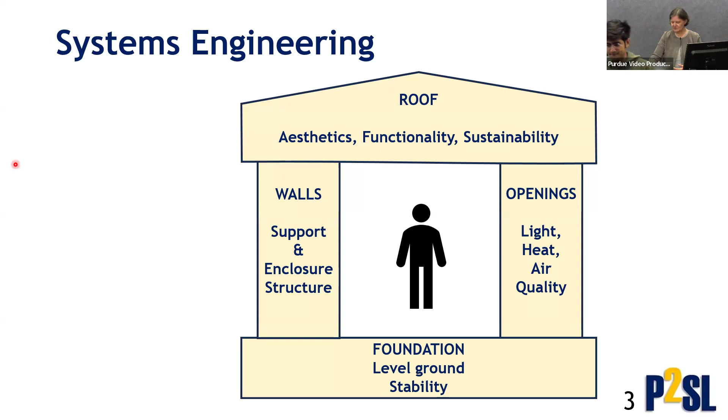But of course, what's really important about the functionality of this house is that all the different systems have to work together, right? They have to be attuned to one another. It isn't just about optimizing one part and ignoring the other parts, right? So in Lean, we very much talk about systems engineering and applying the scientific method for that. So here's the metaphor that Toyota uses to describe their Toyota production systems.

So the reason for segueing into Toyota is that besides this aha moment that I and colleagues had about there's something missing in our managerial theories for project management, around the same time in the 1980s, early 1990s, it became very well known to the world as to how Toyota was designing and making cars. And it turns out that in the course of about 50 years, Toyota went from a virtually nothing company to the world's biggest, best car maker globally.

And you can imagine, especially the American automobile industry was very much in shock about that being the case because they had been very much at the forefront of designing newer and better cars. And how could it be that there is this Japanese company that does things differently? So a large study was commissioned, performed by people at Harvard and MIT. They went to Japan, they studied the Japanese methods, and they realized it wasn't specifically a Japanese method, but it was Toyota that had very much figured out a different way of designing things and building things.

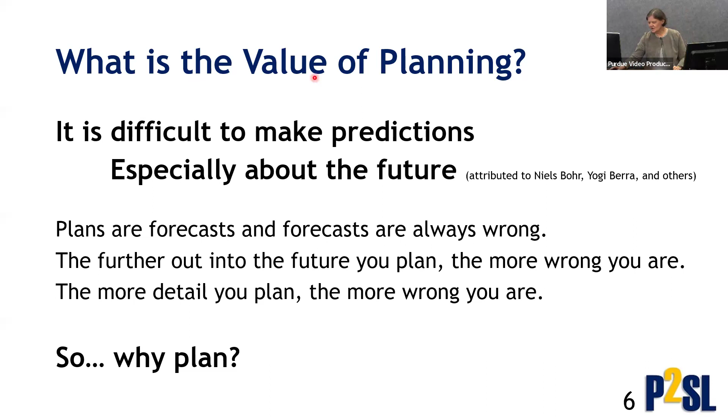Right, so then how do we think about planning? What does planning look like? So in traditional project management, we think of it in this way. You have this very big scope of work that needs to be done. Of course, it's much too big to do everything at once, so we're going to break it down in smaller pieces. We can specialize. Different people will be better at doing certain smaller pieces of the whole.

So doing the work here is called transformation. To do the work, you need certain inputs. You have certain methods to execute, and you would produce certain outputs. And then we break the whole down in smaller pieces. We give one piece to one team, one piece to another team, one piece to another team.

And in this approach of divide and conquer, our assumptions are that if we can do every piece as optimally as possible, we think that we will also perform the project in the most optimal way, right? And that seems reasonable, and that is true, but only in one condition. And the one condition is that you can break down the whole in pieces that are totally independent of each other. Now, that in reality never happens.

The pieces that you have, you can handle them as independent pieces, but they will have interdependencies between them. And you can sever the interdependencies in going from the whole and breaking it down in pieces so you can address the smaller chunks. But you will find when you put the smaller chunks together that maybe they don't go as well together as you had imagined to start with. Maybe the whole, therefore, is not produced as optimally as you can.

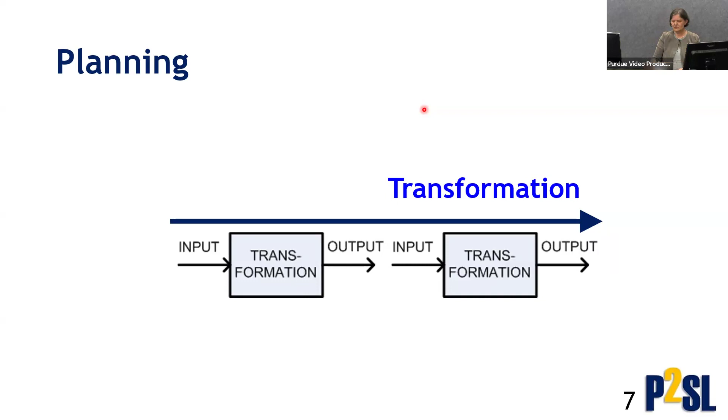So the knowledge that we have, the model that we have in mind as planning, as dividing and conquering, maybe we should describe it as work as imagined. We divide the work and then we think, oh, this work is going to be done in this and this way. And as unfortunately many of us do, we hope that everything goes as planned.

But is that the case? What is the chance that everything will go as planned? Again, zero chance. Things will not happen as planned. So the counterpart of work as imagined is what we call work as done. And I'll give you one example and see if that resonates with you.

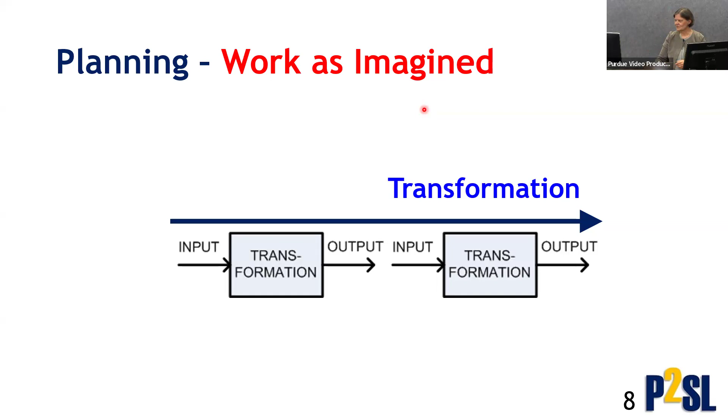Of course, in this case, it's pretty obvious, but there are many other reasons why people may not do what the planner had anticipated, right? People come in with different perspectives. Maybe the drawings, the specifications are not so clear. There's some ambiguity in it. There's many, many reasons. Sometimes people are creative. They have better ways of doing what you actually ask them to do. So many good reasons. I don't need to expand on that.

But what I do want to expand on is this notion that as we plan, we describe what we think should happen, right? This is what we think should happen. Now, the reality is that what can happen is oftentimes quite different from what should happen. You may need ingredients. There are certain prerequisites that need to be satisfied for you to be able to do what you should be doing. And ultimately, what people do themselves, what they commit to doing, what they will do, is quite different from both what they should do and what they can do, right?

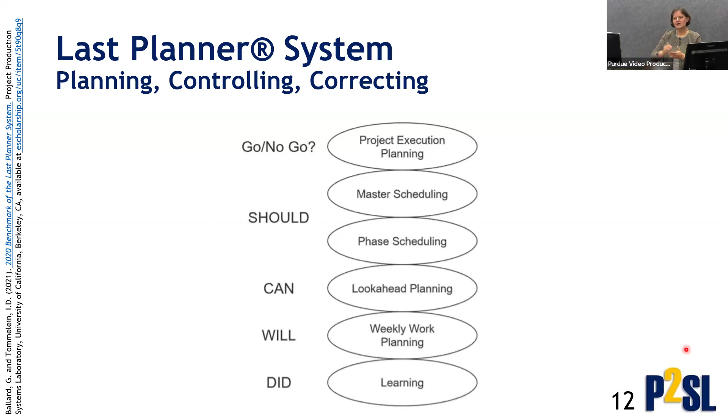Is it a supply chain problem? Is it a lack of knowledge? Do they need more training? Is it poor instructions? Whatever the requirements are. So we can catch the mistake immediately and prevent that mistake from happening again. Right, so that system is what we call the last planner system.

Now, the last planner system begins to address this transformation problem where we need to understand interdependencies and the difference between work as imagined and work as done. But there's other parts that we need to consider in our production systems. So the transformation model is very much this input-output model. For those of you who've been doing scheduling, when we develop our CPM schedules, we simply define precedence relationships between activities, finish to start, and so forth. But we don't really say anything more about what the preconditions are for starting work. And there's usually a lot more to be said besides resources. We need to figure out materials, for example, and instructions and so forth.

So taking a step back, in addition to understanding that there were some pieces missing in the language of project management, such as space, and that breaking a whole into pieces, solving the pieces and putting it back together is not going to give us the optimal solution, we also looked at other bodies of literature out there. Besides the project management literature, which very much is transformation-based, in industrial engineering there's also a whole body of literature that has to do with queuing theory, the theory of waiting lines.

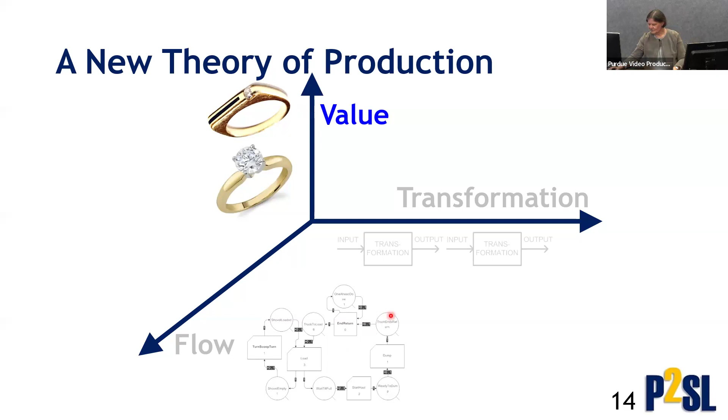Right. So the theory that we have been pursuing here, as identified by my colleague Lauri Koskela, we call it a transformation flow value perspective on production. And the important thing is you need to do all three, of course, and you need to balance, right? You don't want to optimize one at the expense of the other, but you're not going to be perfect in all three at the same time. So you need to begin to weigh. You're going from one to the other.

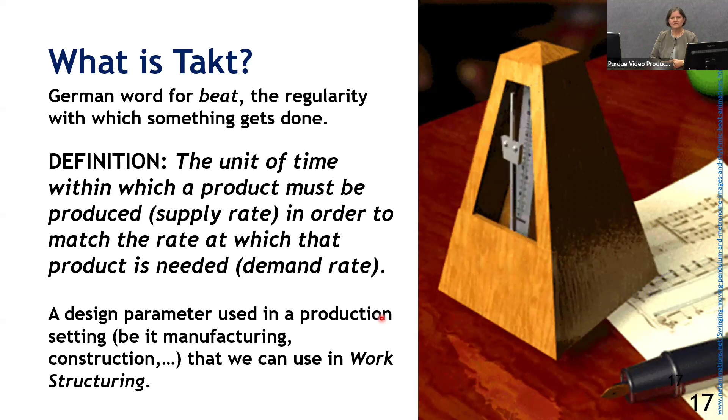So what is takt? What is takt planning? You could see it here with the metronome. Takt is all about establishing a regular beat for production, and the beat is determined, of course, by value, by what the customer wants. If you're going to sell a car to customers and you have the demand for your product at 1 car per minute, then you need to produce at 1 car per minute, right? So we have a demand for the product that is going to help find the takt, and now we can use that takt to actually engineer our project production system.

And where does takt planning fit in the Last Planner System? I think it fits at many different levels. I'll talk today a little bit about operational takt planning, which is how do you actually develop that schedule, that plan, that gets us from the should to the can.

But of course, anytime you're going to change the way we manage and the way we produce things, you need to get everybody on board to understand what the requirements are. And if you want your subcontractors to do anything different from what they're used to, you better tell them before you sign the contract, right? So you need to understand the supply chain implications and make sure that you can align the supply chain to the requirements of the projects.

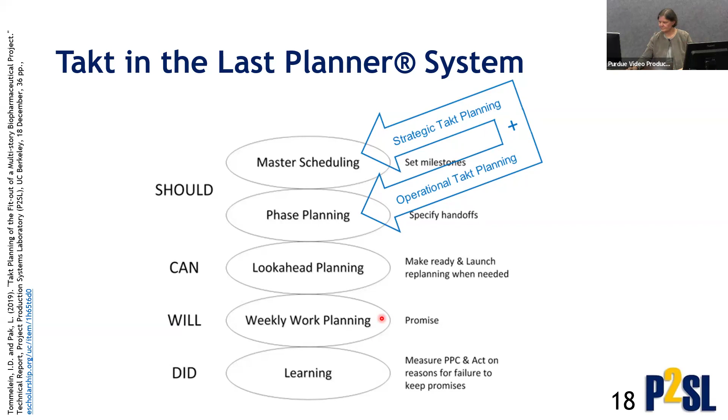All right, takt planning, what are the objectives in the system? Well, we have trades involved. There are trade specialists. We obviously want to tap into their expertise. They know how to do the work. Let's ask them how they want to do the work, and let's try to let them work in the way they prefer, because that's why you have specialists on board.

We'd like to aim for constant crew size and continuous workflow. Constant crew size helps with improving productivity. It also helps with safety performance, and there are many other reasons why that is a good thing. We want at all costs to avoid trade stacking. So we don't want different trades to be on top of each other. And so the rule in takt planning is 1 trade in any location at any one time.

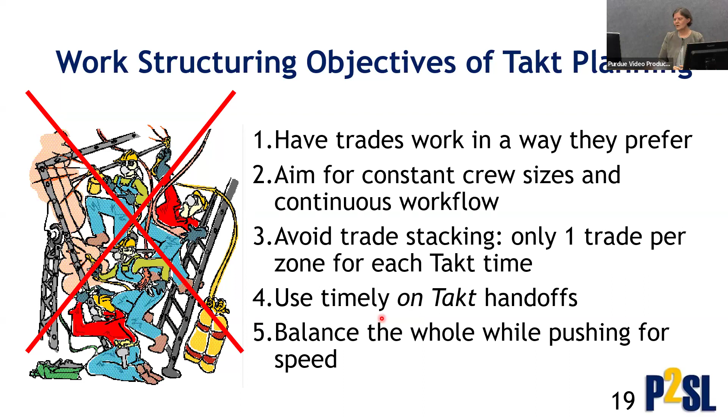Okay? And then, of course, we want to use timely takt handoffs. And then, ultimately, we want to push the whole production system to match the speed that is required by our customer. So a little bit more detail, since I think this is a new topic for many of you.

So what we do in takt planning, I said this is the operational takt planning. So at this point, we know who the subcontractors are, so we can actually go look at the drawings and specifications so we understand their scope of work. We can pick a part of the site, maybe a floor, and we can map out with these specialists what steps they need to perform and who's going to come first and next and so forth.

So we do this process diagram at the top here with sticky notes, color-coded for each different trade. Some trades may not care who comes first, but they know where they fit in the sequence, and so we'll have to resolve who is going to come first, who's going to come next, because we only want one trade in any space at any one time.

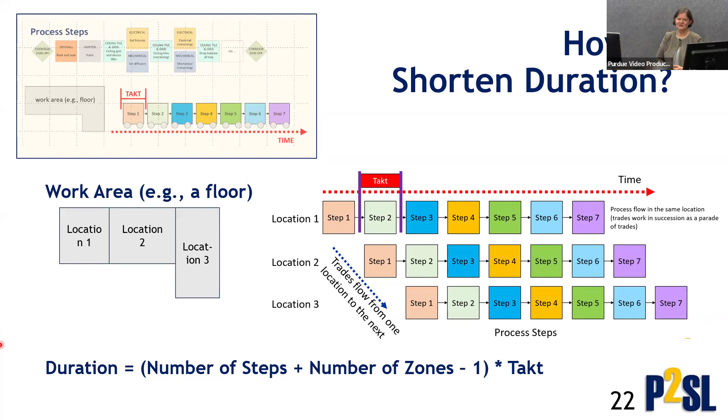So with that, let me move on here. One of the things that you really need to do well is to make sure that when somebody performs work in a certain area, and they'll have to relocate to another area and relocate to another area as opposed to having the whole floor to themselves, you want to make sure that they can relocate without a huge penalty, right? That it's easy to move from one location to another location.

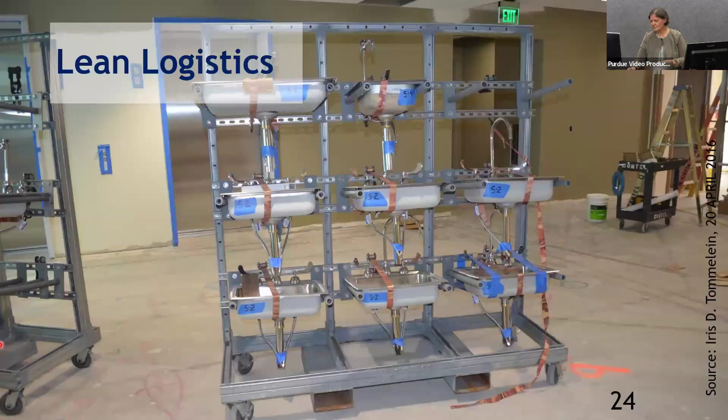And likewise, of course, you need to tune your supply system so that when you are in a location, you have exactly what you want, what you need, nothing missing, right? Impeccable execution. And you don't want to have too much excess, because any excess stuff you're going to have to move, and that's going to cost you extra work. So what does the quick changeover and what does integrated logistics look like? You may wonder. I'll give you an example here from a plumbing contractor working on a hospital project.

So what have they done here? Well, first of all, you notice that they have a cart. Everything, as you can see here, is on wheels. So it's very easy to load these materials to the site. You will see that their cart here has these rectangles, right? So it's easy to lift this with a forklift and move it off the truck and onto whatever floor level you need to be. An important thing we learned is you want to make sure that these carts have brakes, just for reference. It's really important. But anyway, it's easy to move, right? So you can easily relocate from one location to another location. Easily move on site, easily move off site.

The other thing that you see here is there's different components. These are quite extensively prefabricated, right? Many different parts have already been put together on it. You can see even the faucets are attached to it. Some of the drain pipe is attached to it. So this plumber has gone through extensive lengths to prefabricate, and by prefabricating, of course, they lower the amount of time that they need on site to do their work. So that helps them stick to very short takt times.

And then the other thing that's happened, of course, is kitting. So in some of these components, you can see that there's some additional parts provided that maybe they couldn't quite attach to the assembly that they have made. You want to make sure that everything comes together so that your crew doesn't have to wander off left and right to find what it is they need. Okay? So that's what lean logistics looks like.

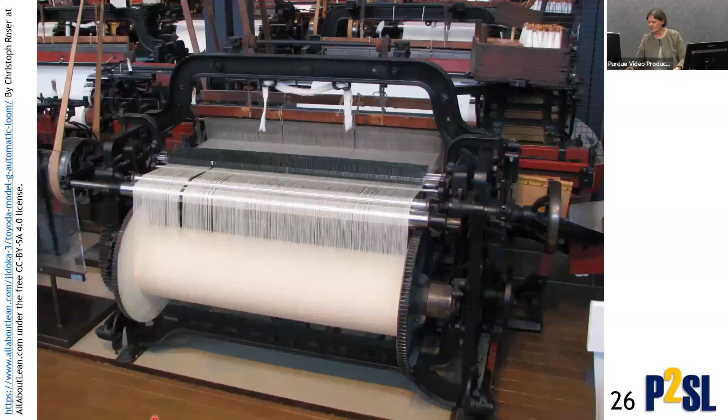going back in history here, this is a loom, a weaving machine. It's very important as a historic piece in the history of technology. This machine actually in 1924 was outfitted by the Toyoda family at the time. The Toyoda family, before they made cars, they actually were in the weaving business. They started in the weaving business in the late 1800s. And they were very ingenious in designing these looms and automating them, even to the point that they had patents, and they would license these patents to the British, right?

The British, who of course had an extensive weaving industry well before the Japanese. Anyway, what's special about this loom is that, of course, with the loom, you have a shuttle going back and forth, and every once in a while, a thread breaks. And as soon as a thread breaks, of course, you're going to have a defect in your fabric.

And the sad thing about that is, well, besides having the defect, depending on how much fabric you already have produced, maybe you have to throw everything away because there's nothing you can do with a piece of fabric that you already have. So it's costly to have defects, right? That's true for weaving, that's true for anything. It's always costly to have defects.

So Sakichi Toyoda at the time devised an ingenious mechanical way for this weaving machine to automatically stop if one of the threads broke. So he had a counterweight mechanism, and as soon as the tension stopped, the whole machine stopped. So why is this good, right? You're still making a defect.

The good thing about it is, before that, you had to have one person per machine keeping an eye on whether the machine was continuously working. Now, if the machine automatically stops, you can have one person supervising 10 machines, 20 machines. Right? And that's really the notion of the Jidoka, or the autonomation part.

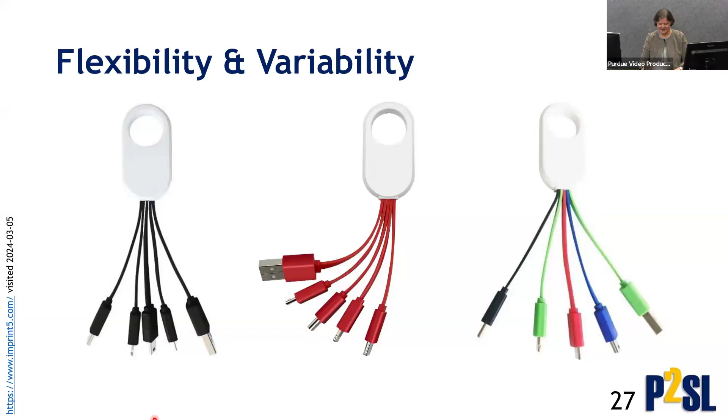So this is what we're thinking about when we think about mistake proofing, when we think about what can go wrong, and how do we make it easier for people to not do things wrong, right? Not pick the wrong one. So this color coding didn't quite work out as far as I'm concerned here. But the connection pieces worked well.

We built in flexibility, and you can build in flexibility by providing all the different options, but that's a rather costly implementation. We think of flexibility also in other ways. You can see here the USB Type-A connection. There's no symmetry here, although there's only one way to plug that into your computer, right? Now think about when you last tried this. How many tries did you have to plug it in, right?

If you're lucky, it's 1. If you're not lucky, it's 2. Sometimes it's 3, yes? So if it's 3, you've just taken 3 times as long as it should have taken. Yes? Not good. Not good, right? Every detail matters. So the USB Type-C, of course, is better because there's no up and down.

You just can plug it in. But of course, something that's symmetrical accommodates even more opportunities, right? The headphone jack is all around. There's only one way to plug it in. So obviously, that's a much better design. So if we can design things to be kind of more universal, then we can save people time doing things wrong.

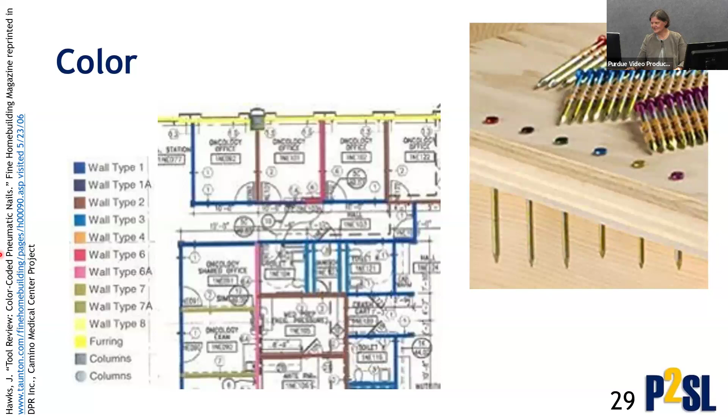So I would urge you all to really think twice when you pop that next graph from Microsoft Excel or from Google in your document and kind of use the default settings. Don't think that the default settings, in fact, are good settings, right? Don't think that they're good. You really need to think about what you want to convey and how to get the colors right. Because what happens when you don't get the colors right, right? And what does right mean?

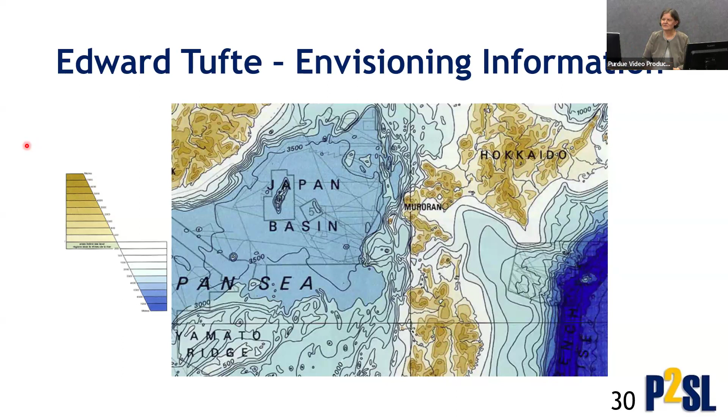So here we have a map, right? And on the left-hand side, you see a very nice depiction of what the color coding looks like. The taller mountain is darker, and we go to sea level, and the deeper the sea is, the darker it is, right? And I think you can look at this map. It's very intuitive. What if we change the colors? Oops, and now, right? And this is only half of the picture that changed colors, mind you. Only the sea level has changed colors. But you change colors and it becomes incomprehensible, right?

So if you don't choose the colors according to whatever the shared understanding is within your community, then you create complexity, right? You make it much more difficult to understand what's going on. We call this self-inflicted complexity. So admittedly, our world is complex, right? And it becomes increasingly more complex, but we're not all the victims of fate, right? It's not just that things are the way they are. Some of the complexity that we see is complexity that we do to ourselves. And this is a good example of it.

So some of the complexity you can design out when you design a very good project production system, whether it's through color coding and visual management, whether it's through takt planning, where you create very much regularity in execution. There are many, many other ways where you can simplify and just make it much easier for people to understand what is expected, what to do, and you make it much more likely that your plan is going to be executed as planned.

So with that, let's get back to our house of Toyota. We've talked about just-in-time, we've talked about the Jidoka. You can understand that by reducing the self-inflicted complexity, we create more stability in the production system, which then means it's more controllable and more executable to ultimately achieve the best quality and best time performance and so forth that we want to have.

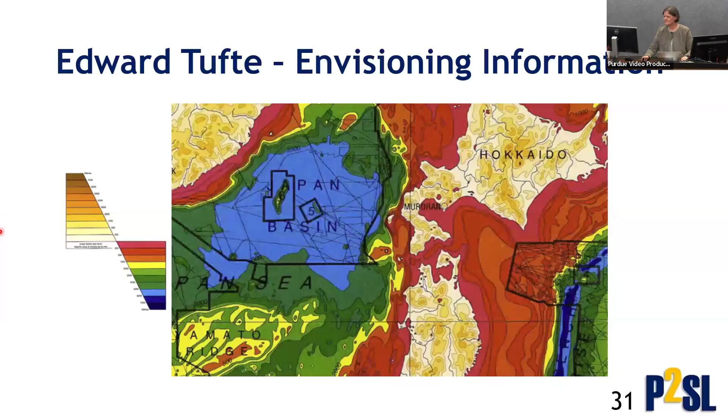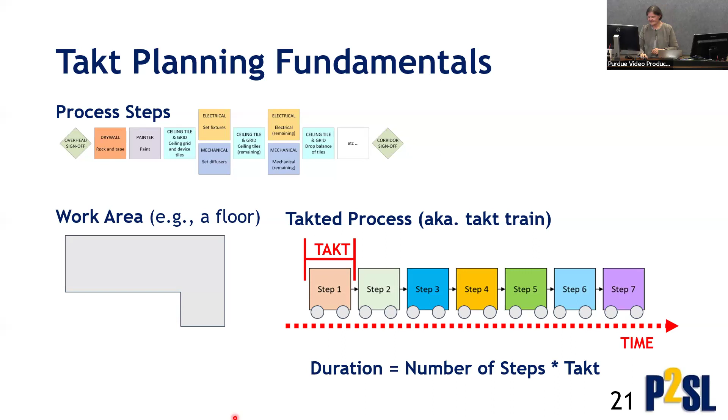However, what our traditional project management or CPM schedules don't talk about is variability in execution, right? So they assume that if you give 3 days for an activity, it's going to take 3 days. Does it take exactly 3 days to perform anything that you say is 3 days on the schedule? No. Probably not, right? Hopefully they're done in 2.5 days or close to 3 days, but if things go badly, it may take 3.5 days, who knows? But there's variability in the system.

So if you want to have reliability in that handoff from one step to another step, you have to do what's called underloading. And underloading means you have to have some extra standby or swing capacity, whatever you call it. You have to have resource available to accommodate the variation in duration as it occurs in the moment. So you have to have, in a way, more people than you would assign, because you want to make sure, absolutely sure, that you're going to be done in time.

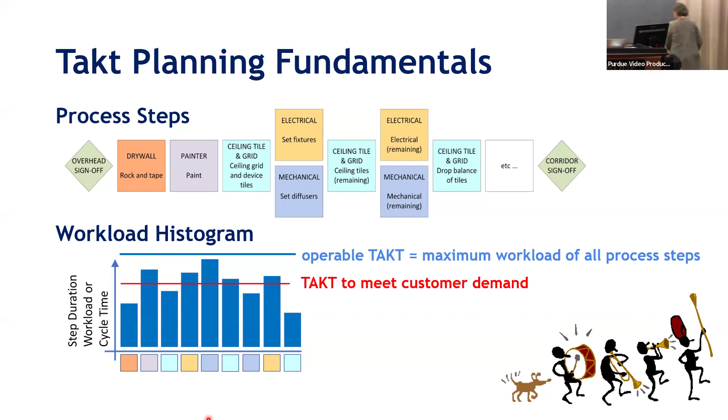I would say it depends on the money. If I'm getting paid enough, yeah, I'll do it. Which money is the question? Sorry. So it depends on which money. Is it the money in your project contract? Yeah, let us say if I'm getting some kind of bonus for finishing my task faster, or if it specifically says in the contract I have to put in some lean logistics, I'll do it.

But if I had positive experience with lean logistics, then I will do it, right? Like, I don't know. So certainly if your contract says that you should do it and you signed a contract, you should do it, right? There's no question there. But look at this example, right? The question for you is, do you think this is a one-time deal for this company?

Does this company only do one project? No, probably not. You need to make an investment in the carts. You need to make sure you have a forklift available. You need to make sure your fabrication shop is set up, with all the right padding and adjustable brackets and so forth. This is not a one-time deal.

So if you're running your company, this is a specialty contractor. I can tell you they have been involved in lean projects. They do a lot of lean projects. But this type of investment, it's just a good business decision. Why would you not do it? Right? Let me give you an example, right?

I don't know about you, but I really don't like to clean up my house. And the sad thing is it always takes too long. So should I invest in getting better at cleaning my house or not? What do you think? Yes? What's the value proposition? Can you buy cleaning services that are of greater value to you than the time you spend cleaning? Fair enough. So you can outsource it.

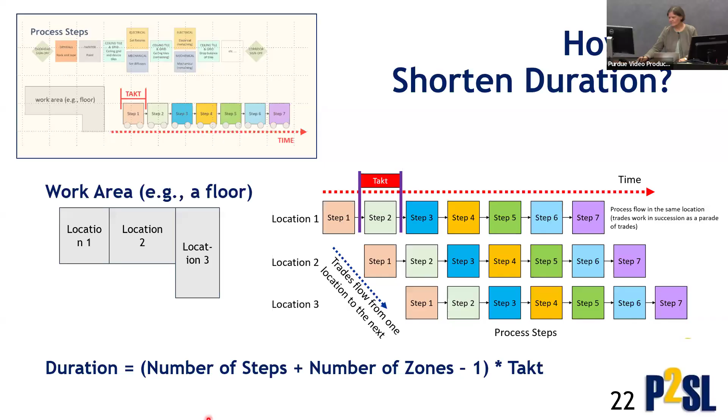Sure. I mean, technologies, use them as you see fit, right? Why not? Technologies, whether it's low tech or high tech, do it. Let me see if I can go back here. The question is, what's the problem with communication, right? What's the root cause of the communication problem? And technology can provide an answer.

Your 6 and 9 example, you can say, maybe there's some way that I force people to look at the computer screen so there's only one interpretation. There's also a very low-tech answer, right? A very clean mistake-proofing answer is sometimes you put a little bar under the number, and you can see whether it's a 9 or a 6, and you resolve the ambiguity.

So yes, technology can help, but I would suggest start with no technology, right? The very simple solution, and that way, if you can make your solution robust, like drawing a little bar under the number, then your problem is solved. Why bother with technology, right? So you don't want to implement technology for technology's sake.